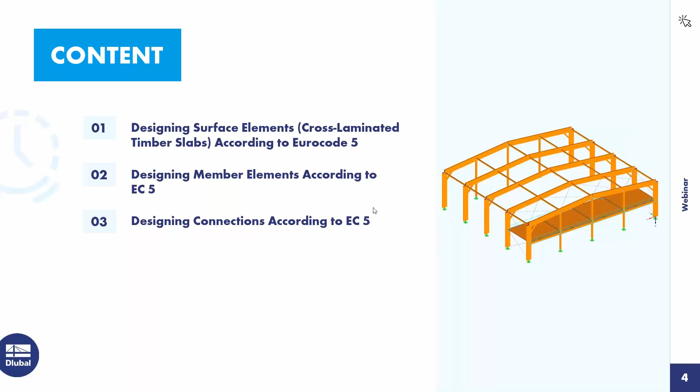All right, thank you. I hope everybody can see the screen. We had small technical issues related to the microphone in the last webinar, so whenever that's the case, just give us a sign and we will try to react to it. Also, in last week's webinar where Andreas modeled this structure that I'm going to design now, there was a question that it was sometimes too fast and attendees could not work in parallel with what Andreas modeled. To this I have to say, that's really not planned. You should focus on what I'm designing here today.

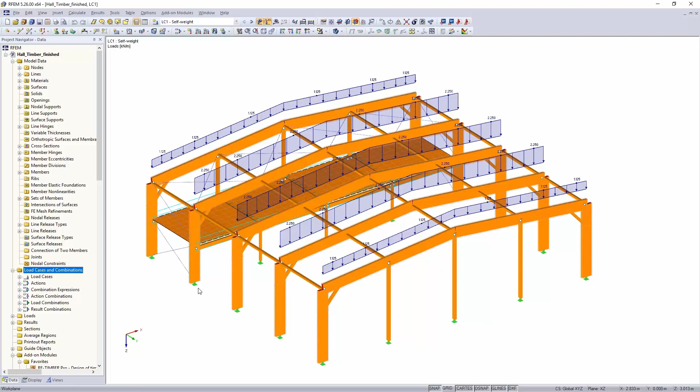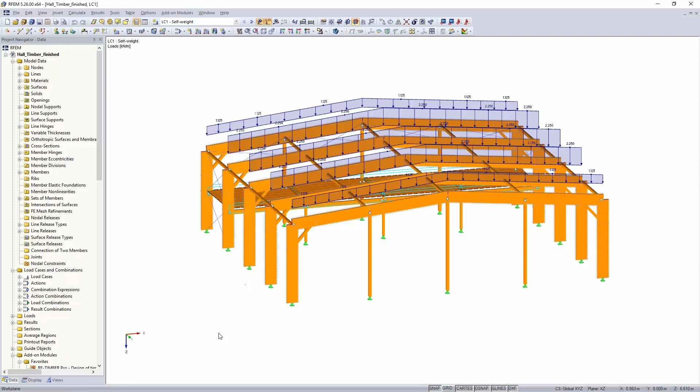The webinar is recorded and you can model it afterwards, but working in parallel is maybe not such a good idea. Another question last week was what you can do in case you have a rafter with a roof overhang, a cantilever, and how to regard that, as Andreas modeled the creeping according to serviceability limit state with a creeping factor for moisture class 1. In such a case you would have a rafter with moisture class 2 on the outside and moisture class 1 on the inside. I want to give you a short example of what you could do in such a case. On this truss, I will not add a cantilever, but I will show you what you can do in a highly nonlinear system. Therefore, I'll focus on the beam or truss in the middle.

Let's have a look at this, and I'll take a look at the serviceability limit state in combination 117. You see that in order to regard the creeping, the software increased the load by a factor of 1.6. Andreas mentioned that last week. Now, how could you do that in case this was a highly nonlinear system? Because then increasing the load will not regard creeping correctly.

That would work via copying this and reducing the stiffness. That's just one way to do it. So in general data, I will now switch off the automatic load combination and keep the current load combinations, say OK. Now I go in here and select load combination 117, copy it, and call it 'nonlinear'. Here I have this copied one. I go edit there, and first I have to reduce the increasing, so just use the characteristic level.

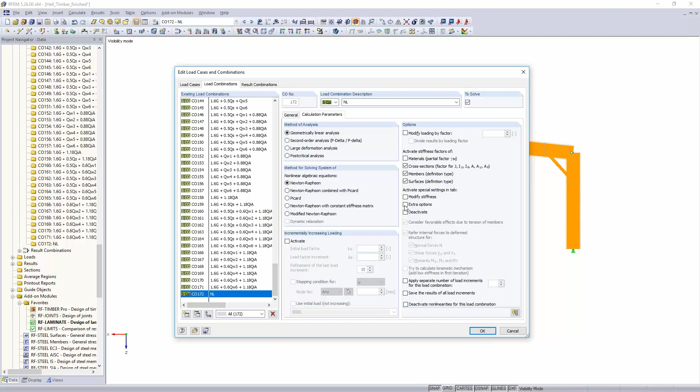Then in calculation parameters—we're going to need these options later on also for the ultimate limit state—there's a check box for modifying stiffness. If you activate that, you can reduce or increase stiffness of hinges, materials, supports, for nearly everything in the structure. For our case here, we will reduce with the vice versa value of 1.6, so that's 0.625 for every stiffness.

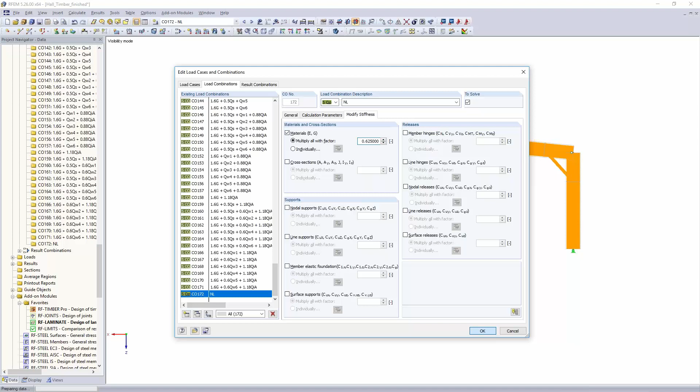Press OK, and now when we look at the load combination—we want to see both—at load combination 117 you see that you have a deformation of about 40.7 millimeters with the increased load, so with a factor of 1.6.

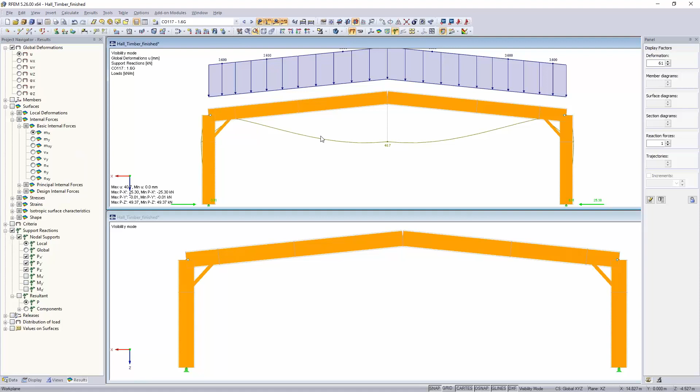So with this increased load, and here in this nonlinear combination we have the original characteristic value, and if we look for the deformation there, as this is now a linear system, you can really compare that very easily, and you see you have the same deformation just because we reduce the stiffness.

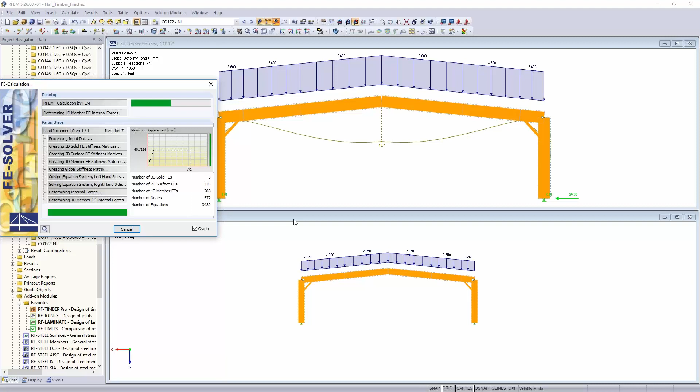So this is a way how you could do that, in my opinion pretty easy, also in case you have cantilevers outside, because then the timber material on the outside you could reduce with the factor of 1.8, which is for service class 2, and then the inside you use the 1.6. So it's just one way how you could do it. There are more options, but this is a way how I would recommend.

This was just due to the questions that we had last week, and as they were coming pretty often, I think it is worth showing that to everyone.

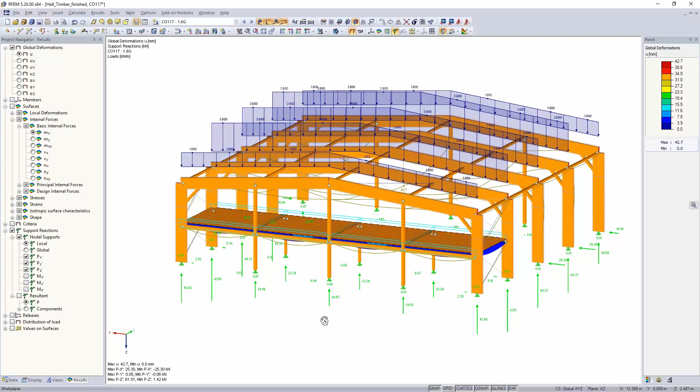Now we go into designing. Andreas already modeled here a CLT plate, just for generating the stiffness that we would need for the design later on. But what he did not do, and what makes absolutely sense when you model the structure not to do, was to also generate the stiffness for the line hinges and the releases.

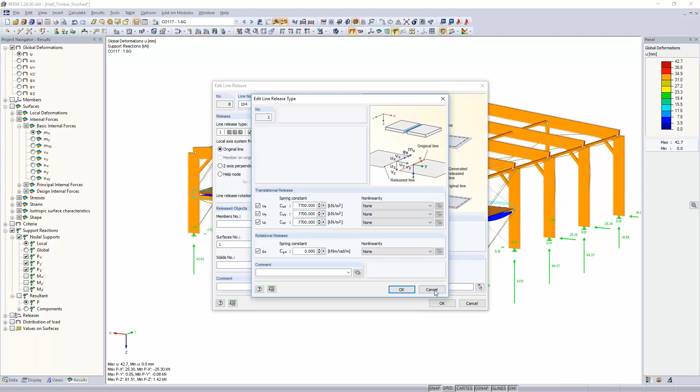So he just generally introduced this stiffness here, but for the ultimate limit state you have to reduce this by a factor of 2 divided by 3, the slip modulus. For everybody who wants to know where it is written, it's in equation 2.1 in Eurocode 5, and you can do it similar to what I did before with the serviceability limit state.

Just go into edit load combinations here, and then you check on the ultimate limit state, like every combination of the ultimate limit state, calculation parameters, and again switch on modify stiffness. In modify stiffness you say the line hinge and the line release we now also reduce by this factor according to equation 2.1 in Eurocode 5.

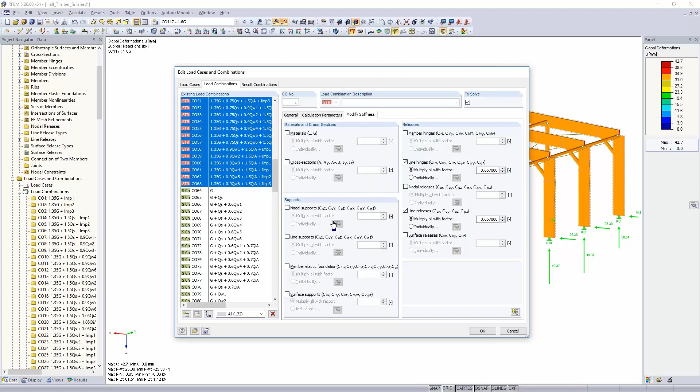Okay, so then this is done, and for SLS we are designing on characteristic level. Yes, that's what we want. So now you have also kind of generated the stiffness differently for SLS and ULS design.

Then you can now go to the add-on module Laminate, what Andreas already showed you last week. He used just the result combination here for the design. Usually you should, for the ultimate limit state in Laminate, use load combinations because it's generating stiffness and it just makes more sense.

But of course this will take now a long time, and in any design add-on that I'm presenting here today, I already calculated the design giving combination, and I will just use that in order to keep the calculation time less and not to spend hours just watching the screen calculating. I think that's not so interesting for you. You all surely know that we can generate combinations and also calculate them in not too long time, but for the webinar we want to reduce it further.

So I found out that load combination 48 will be the relevant combination for me. For serviceability limit state, I will do that similarly. For the characteristic combination, I calculated combination 104. This one I assigned with characteristic. I will get to that point directly.

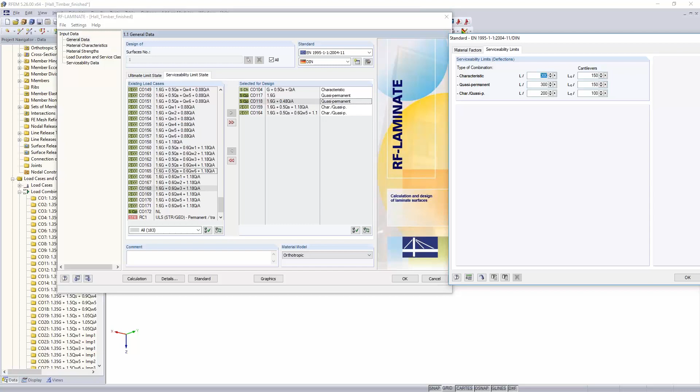Okay, I think the rest was well explained by Andreas already. Maybe we lose a small word on the detail dialog. Here the stresses that are verified in this add-on are predefined also according to the German annex of the Eurocode 5.

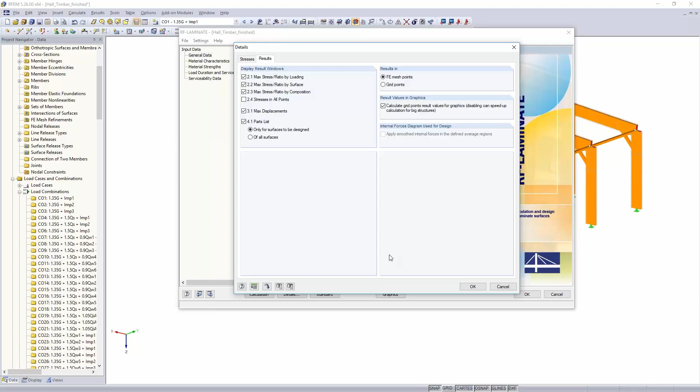In case you have a wall that you want to design, there are more checks you should activate, or a wall with wall loading behavior, then you should also activate these further checks here, but that's something more special. In the structure we are designing today, we just have a plate, or loaded plate, in this case.

Okay, material characteristics. Andreas chose a plate from the producer KLH. Just to introduce all the other producers once again, we have here also producers like Södra, Steiko, and so on.

We try to keep the producer database up to date, but it makes sense to do a double check with the producer, just in case he changed some of his setups or some of his factors. In general, we try to implement every producer according to the technical approval from the producer.

Okay, so we choose the KLH. I'm not going to change that today. Here, edit details was also shown. KLH uses timber without glue at the narrow sides, at least for the stiffness.

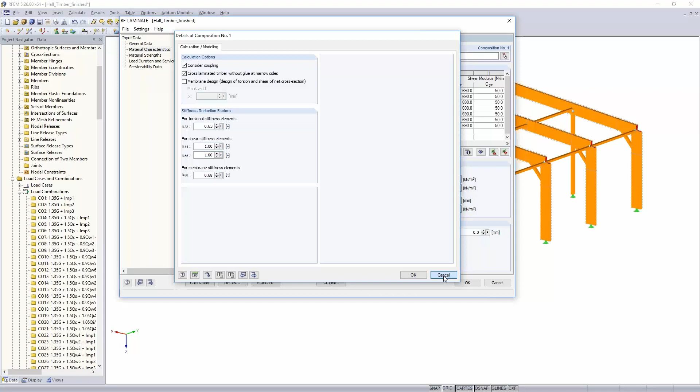That's what I said: in case you have a wall loading behavior, you should activate the membrane design here. All the factors are predefined according to the technical approval, and this generates this stiffness here. The strength counts the same way as well.

And load duration and service class is also assigned. Once again, in case you have a rafter with a cantilever, also for the strengths, you must choose a different service class. That can be done quite easily here. We are completely in service class 1, but for the strengths, you could choose different surfaces with different moisture class. That's no problem.

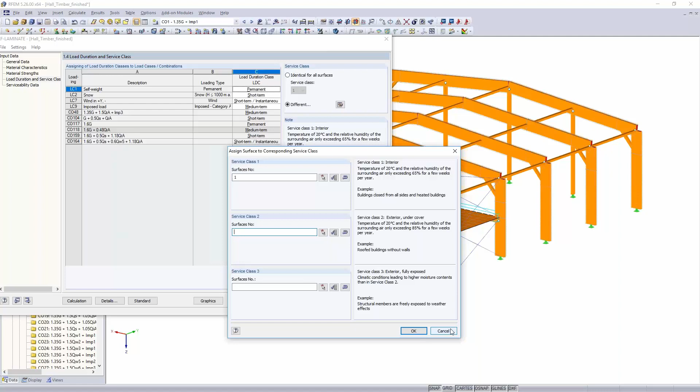All right, and then serviceability data. We just have this one surface here, and we want to verify it to the shorter length, which is from this point to this point, 4 meters and 50 centimeters, and we assign it to a displaced parallel surface.

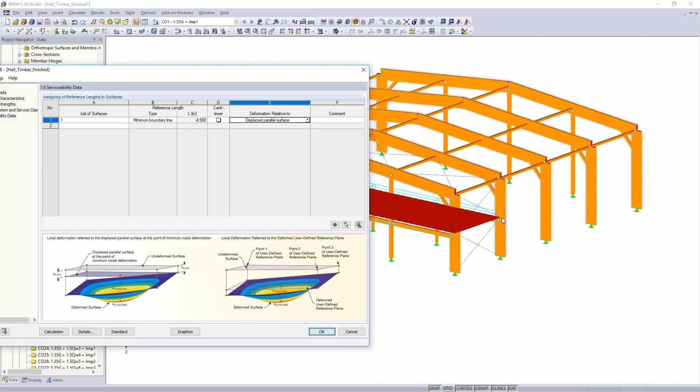I hope these pictures describe it quite well. Undeformed is just the undeformed system, and displaced parallel surface means the whole structure can deform, and we only verify the deformation from one node to the other. All right, then we calculate it.

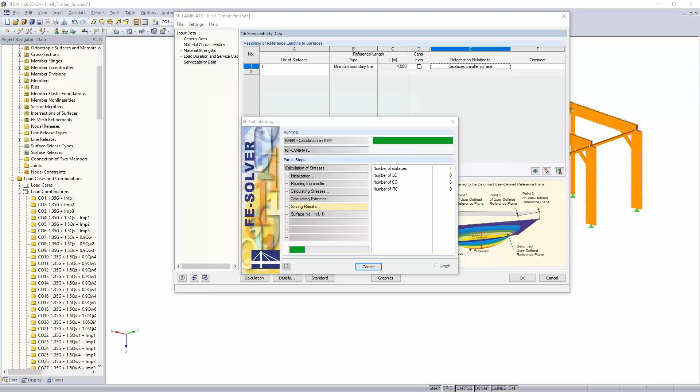Okay, so for the stress design, we have now a ratio of 42% loading, and it is tension compression, which in this case comes also from bending and tension compression on the outer sides.

If you go to the graphics, maybe we can switch off the rendering, yeah, that helps. You see that you have pretty high loading where the support in the middle is, and there are probably also shear problems on the edges of the surface, which also makes sense.

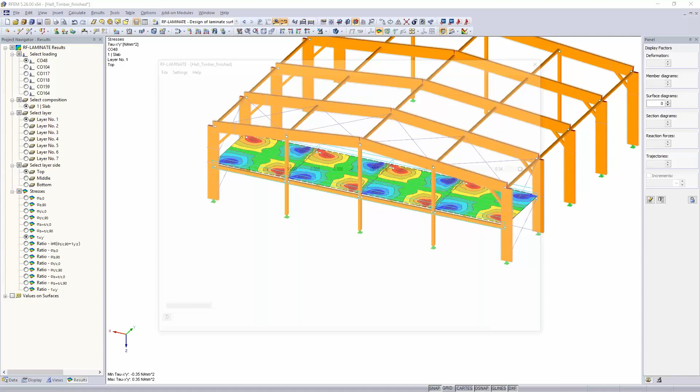So 42% is not loaded that much here in this case, but you also have to take a look at the deformation of the structure, and this is verified here.

And so if you look here, you see that for deformation, the loading is even higher, so we have a loading there of 75% in this case, in the characteristic situation.

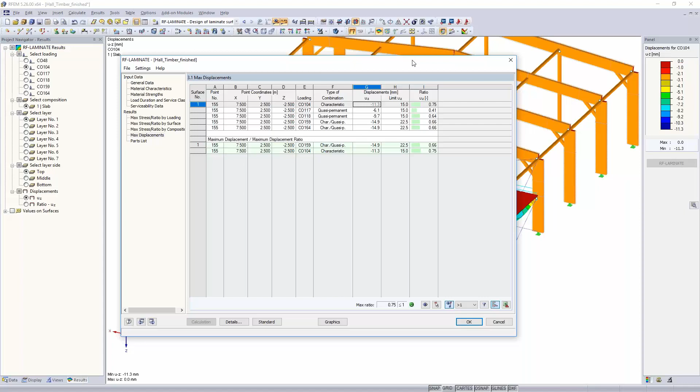And you should then also not forget, maybe you would need deflection analysis as well, just in case this is required.

Okay, so then at all, the design for the beam is done here, or for the panel is done, and we could go to the design of the members. Maybe one thing that I forgot, it makes sometimes sense to get one of these pictures, for example, into the printout report.

You can do that here directly in this column. Maybe when we get a nice shear, this one is probably something you would also want to add to the printout report as well, and maybe something outside the graphics, this one, for example.

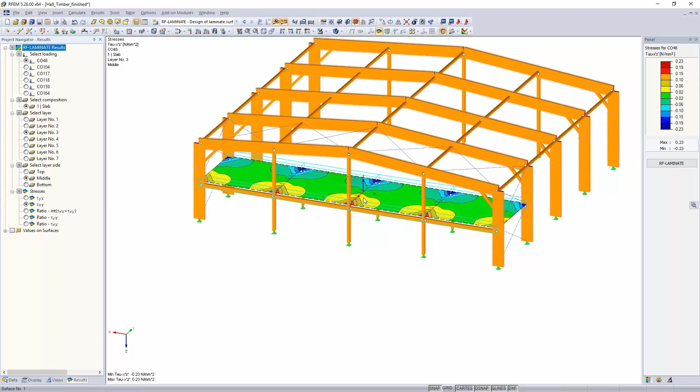So the design of the plate is done with this, but the connection on the edges of the plate and also on the outside of the plate needs to be done, and therefore we will just grab the combination 48 in ultimate limit state.

48, 48, there it is. Here in the result you have down below the option releases, and there you can see what normal force you have in the line hinge.

That's not so interesting here, I think, but for the plate lying on top of the beam, it's probably relevant, because this is the shear between the plate and the member, and that's what you really need to connect. You see that the value is not that low, and that's something you probably need to verify. So this gives you a good graphical overview.

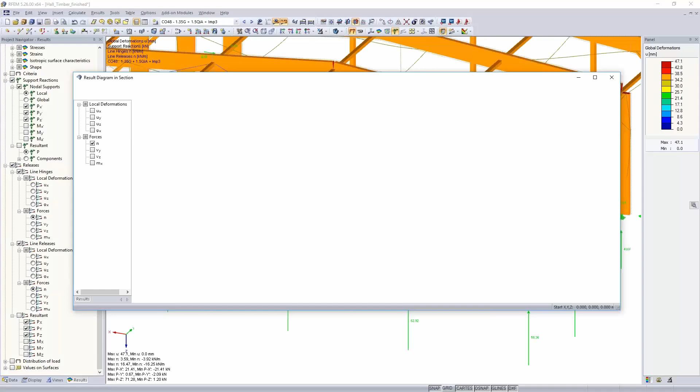Via right-click result diagram, you could also smooth around this area. You see here, it's not a really high peak, but you can say, okay, my connections go, for example, over a meter. If you say I'm starting at 1 meter and ending at 1 meter, and then I want a linear or constant value, you can also smooth it a little bit, so you have a value of 10.8 instead of 15.35 kilonewton per meter.

Okay, so once you have done this, all the design of the plate with its connections is done. So you could say check to this, and now we go to the members. Therefore we will start the add-on Timber Pro.

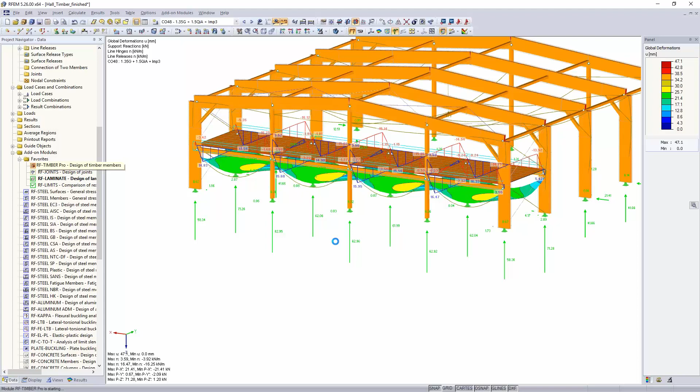In here we have members and set of members. Set of members in our constellation are important for the serviceability limit state. So for the deflection, I will only verify the set of members in the middle, so set of member 9 and set of member 6.

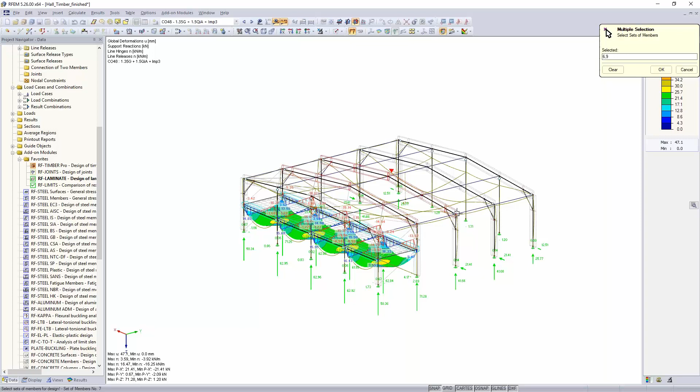The set of member is also important for stability, but in what we are doing here today, we are taking the deformation from the point where you see the mouse here and the mouse there, so we take the whole length and verify the deformation on this part. So that's what we do here.

Once again, I will not verify the complete result combination, as this would be too time consuming for the webinar, so I will use combination 38 and 44 just to have two, and I will do the same for serviceability limit state with combination 72.

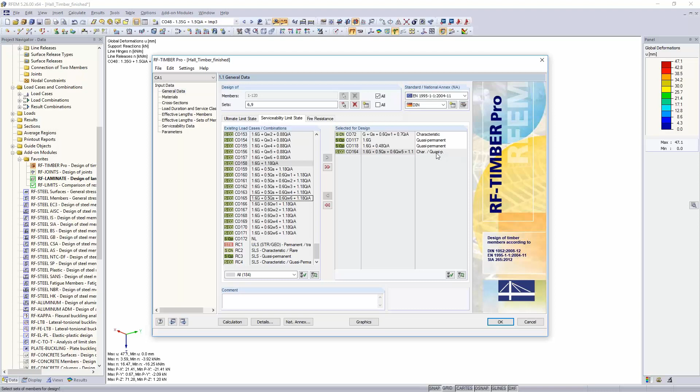For the characteristic level, for quasi-permanent and characteristic, I can choose both, as there are only two generated, and for the characteristic quasi-permanent one, I will use combination 164. Okay, once again, it's similar to what we had in the laminate add-on.

It's automatically designed. If you want to do a simplified vibration design, you could do that here as well. But for the members, I don't see that too problematic here. Maybe for the CLT, that would be something I would maybe add, but we're not going to do that today.

Fire resistance is possible with Timber Pro. It's also possible with the laminate add-on, but it requires more effort. Maybe Gerhard or I will send you an FAQ where we answer that. So it's possible, but in laminate, as laminate generates stiffness, it's just more effort to do.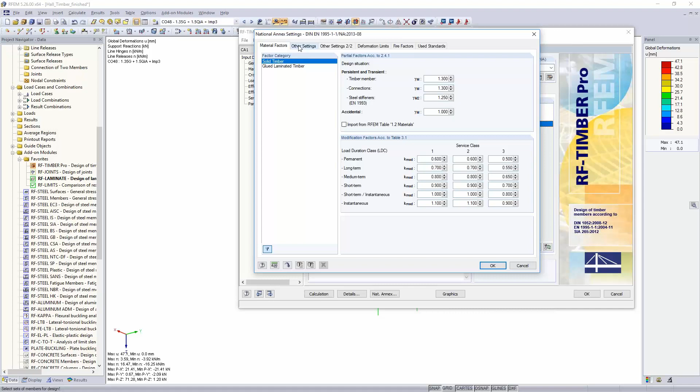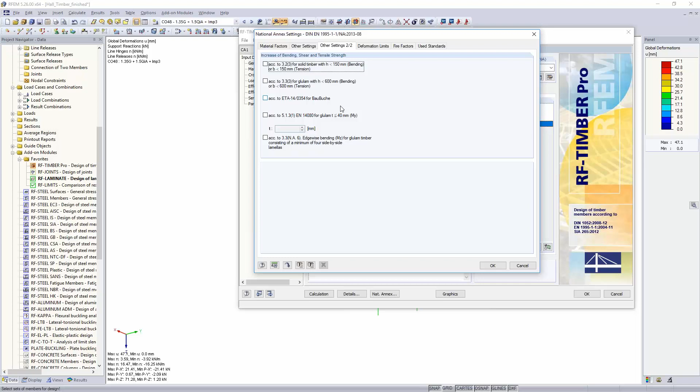Nevertheless, it makes sense to take a look at the detail dialog of the National Annex, because you not only can define deformation limits, but you can also add all the other factors, for example for K-crack, for shear verification. If you want to calculate LVL from the producer BauBuche and so on, you could also activate that here in the detail dialog.

The rest is not so important. Load duration service class, it's also the same dialog as what we had in the laminate add-on. One thing I forgot when we started, in this case we defined imperfections and calculated the ultimate limit state according to second order theory. Therefore buckling does not need to be verified, and for lateral torsional buckling, I have a pretty stiff sheeting and will verify that separately, so I can switch off the whole check for stability.

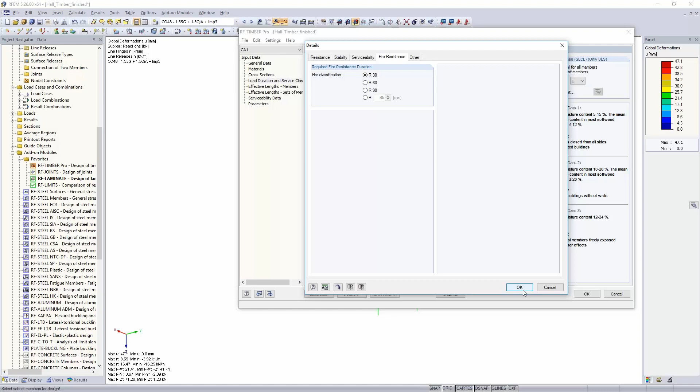Serviceability, that's the same as what we had in laminate, with deformed and undeformed system. Fire resistance we do not do here. Okay, that's this. Serviceability data, okay, we say set of members.

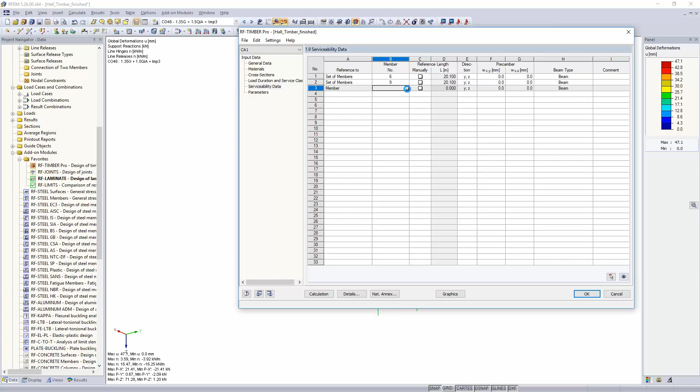I remembered what we did there: member 6 and member 9, the ones in the middle, and I'm using the full length. And maybe also the members underneath the CLT should be verified for deformations.

I will now only take the one here inside. Maybe I just don't care about the ones on the outside, and verify them. All right.

Parameters include shear force reduction and also cutouts, which we do not have in this situation. So we could start the deformation and start the calculation of all the combinations that we assigned.

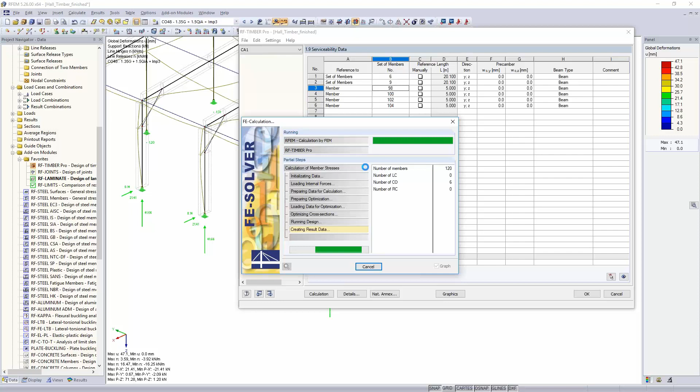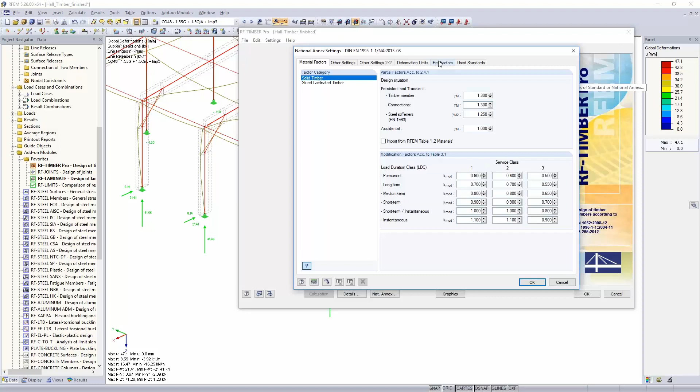Okay, there was a question about fire resistance. Let me quickly introduce that a bit more. I won't verify it today, but just to keep you informed: in order to verify fire resistance, you must create an extraordinary combination in load cases and combinations. Then we reduce the section with the so-called burning rate, and according to this rate we redo all the ultimate limit state verifications with the reduced section. It's not so different from what we already did here. Hope that explains it.

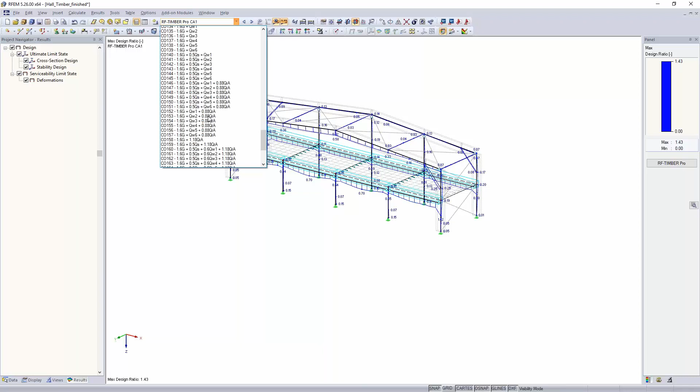Let's look at combination 38, where we calculated that, and check the inner forces, specifically the torsional moment, which is the critical point here.

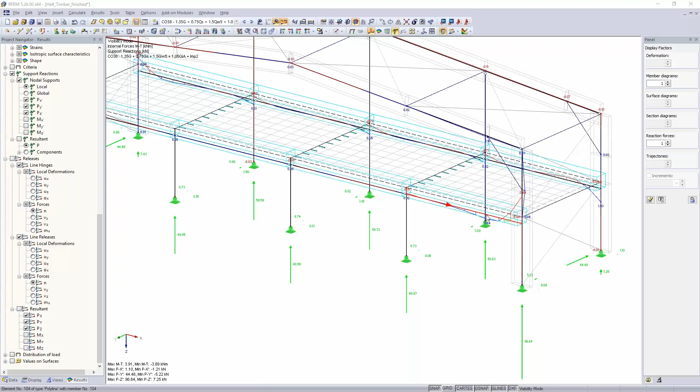In members, torsional moment, let's switch off the releases. You see we have a torsional moment of nearly 4 kilonewton meters on the edges. It's clear we forgot to set the degree of freedom here. It's only set for the moments in Y and Z direction, but not for torsion. So phi x on these edges also needs the degree of freedom set to zero, which is always the case in timber design.

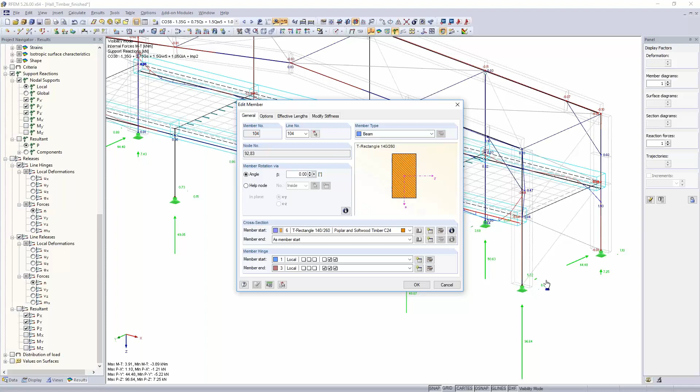That requires that I delete the results, because a moment of 4 kilonewton meters could hardly ever be transferred with any kind of connection type that we have. We'll do the same here on the start of the member, applying the same hinge there.

Now when we calculate combination 38 again and look at the torsional moments, you see that we've really decreased the torsional moment by a large amount.

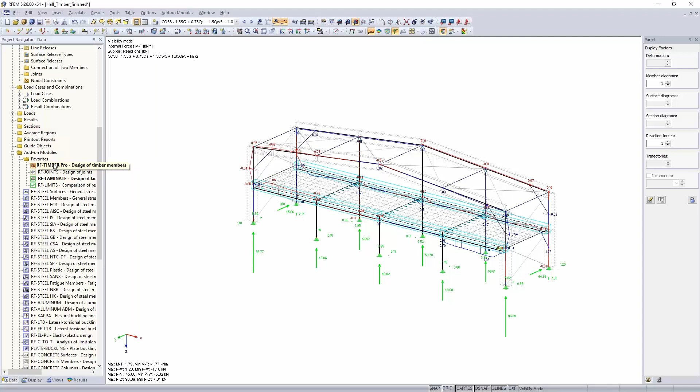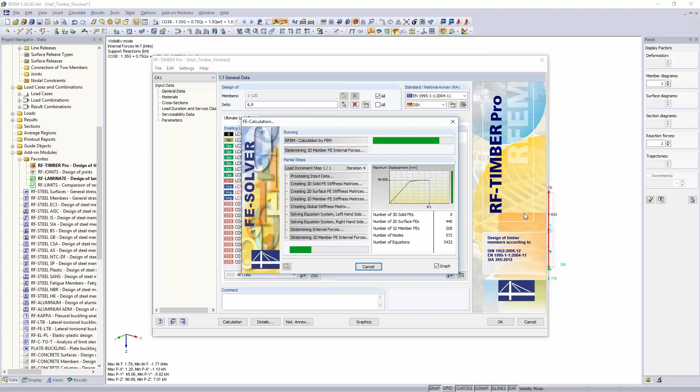Now when we go back to the design in the add-on, we keep the serviceability limit state. It may not make much sense here since the serviceability limit state wasn't really a problem, but let's check the deformation of the longer set of members, and I want to show you the graphical presentation too. Now you see we don't have any problem from the ultimate limit state, and the design is now governed by serviceability. All verifications are listed here, and you can recalculate everything done by the add-on.

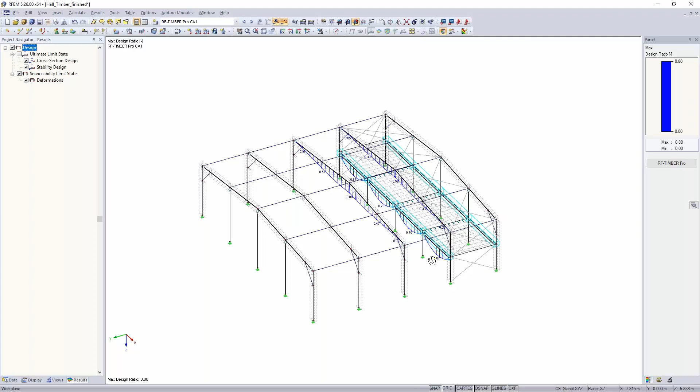If we switch to graphics and view the whole structure with ULS switched off, you see that the longer beam in the middle is actually design-governing, as I expected, with a loading of 80%. The smaller beams underneath the CLT plate are also loaded pretty high.

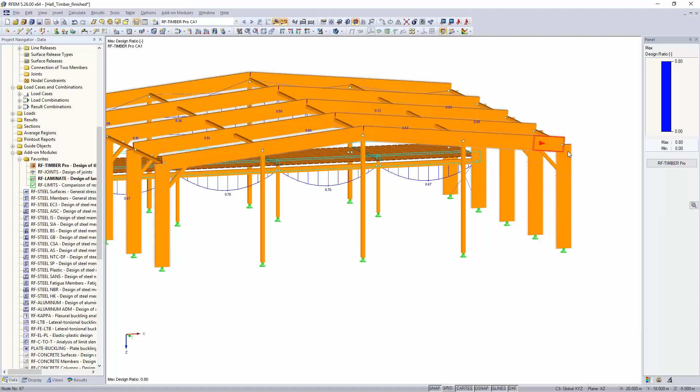That would be the design of the structure. Now we can calculate the connections. I want to concentrate on the connections at the outer edge of the hall, and if we have time, also the connections between the column and the beam spanning from this point to this point. But first I want to design the edges, so I'll start the add-on RF-Joints.

So that's a little bit different to what I showed you in the Timber Pro and Laminate add-on, because in this add-on we have the possibility to design steel and timber. These are all different add-ons. So we are concentrating today on timber, and in this add-on you can still separate between steel to timber connection and timber to timber connection.

Steel to timber connection is every indirect connection where you have a steel plate sliced into your structure, and timber connection is a connection between main and secondary truss or load bearing. So we will concentrate for this corner here on steel to timber connection.

You can calculate dowels, bolts, nails, and screws. We will design dowels. You have the option to design different joint types. Our joint type will be without continuous member, because we will just have two members that are connected in here.

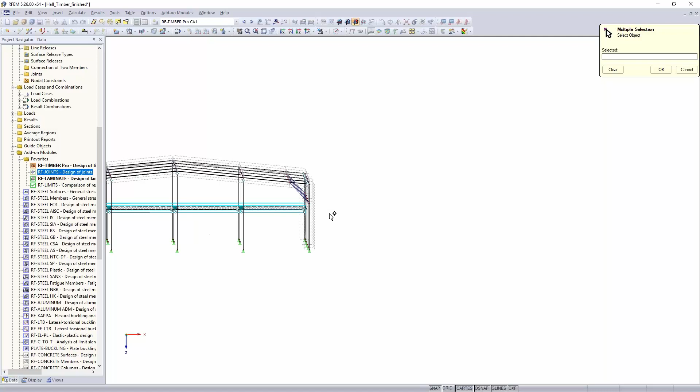All right, then we go into the structure, and therefore we will select - let me switch off the rendering again and also the results. And so we will calculate all the corners here with one check, and also the ones from the other side.

All right, so now I get a lot of alerts, which is clear because we have invalid members, because steel rods cannot be designed with a steel plate, and also the secondary beams here do not make too much sense. So we will just keep the connected member and the main member, and all the other members we will set as inactive.

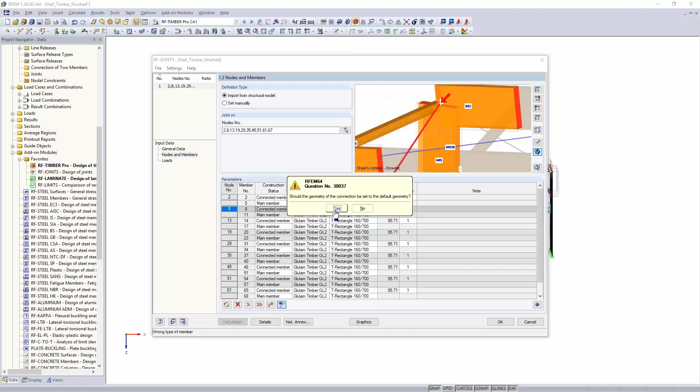So this one inactive and this one as well. And then it asked me, okay, shall all the other connections work similar to this? Yes, that's what I want. And do you want to have default geometry? No, I do not want that.

Okay, now all these nodes have the information that they should be connected in here. Once again, I will just assign one ultimate limit state combination, so let's say 2, 13 and 19.

Load duration and service class I will just skip. I don't think that's too important. And now we are in the dialog of the geometry, and that's now the important dialog.

Here you can at first define the shape of the steel plate. User means that it's just assigning the steel plate on the outside edges of your structure. You could also have it rectangle - then it will be a rectangle one, and it could also be convex. I think user for most constellations is the one that you would want to have.

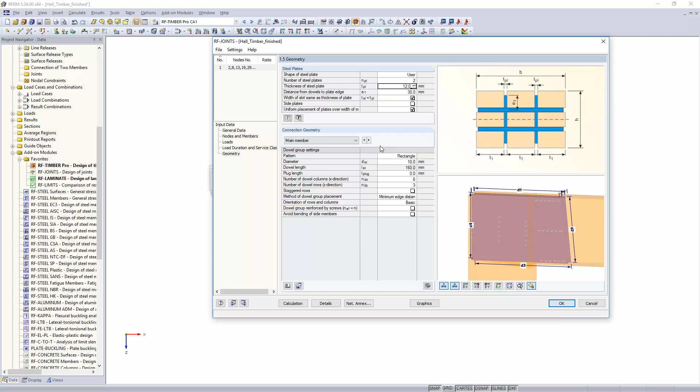You can define up to 5 sliced steel plates. For our first design approach, I will assign 2 steel plates. I will give it a thickness of 14 millimeter, and everything else I will leave as it is.

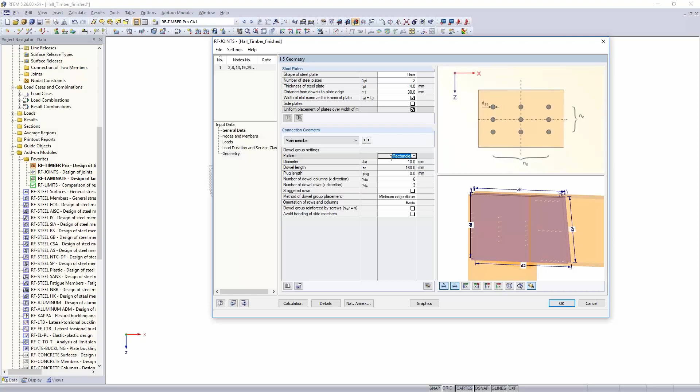We can also define side plates, but I don't want to do that for dowels. It's probably not so sensible. For nails and screws, it makes maybe more sense. We can choose a pattern, rectangle or circle.

And here we define the diameter of the dowels. I keep them similar as the plate with 14 millimeters. And I say I want in X direction 8 dowels and in Z direction 4, and maybe also want a more sensible limit distancing with user-defined limiting.

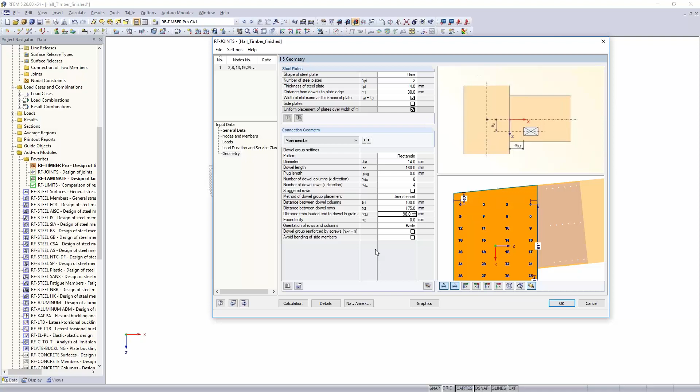So for the main member, I will choose A1 of 100 millimeter and A2 of 175, and that was too quick - A3T by 98. Okay, so that's that.

I have to do the same for the connected member. So that's 14, so 8, 4. And also here I make a user-defined distancing with 105.

I could save all this group to a library and just get it back again. So that's also possible. I do not have to define that every time again and again.

No, talking and inputting is too much. So A2, I define a distance of 160 and A3T a distance of 130.

Yeah, this is this. I could also reinforce with screws, but I want to look if this is really necessary in here. And when I have bolts outside, I can avoid bending of side members. So these are more options that I have.

And now when I calculate it - what did I choose now? 19 and 13, sorry.

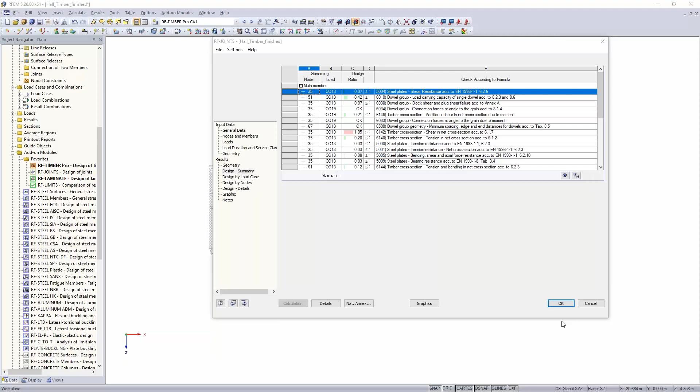So now we see that it's overloaded by 5%, but we also see that the steel plate is loaded nearly nothing, only 7%. The dowels themselves are loaded by 42%, so that's also not that much.

But in the verification of the dowels, you can see that we are verifying the force in each dowel. We really get the force and also the deformation that we have in each dowel. You see that we have an overloading by shear of the timber, so the timber is overloaded.

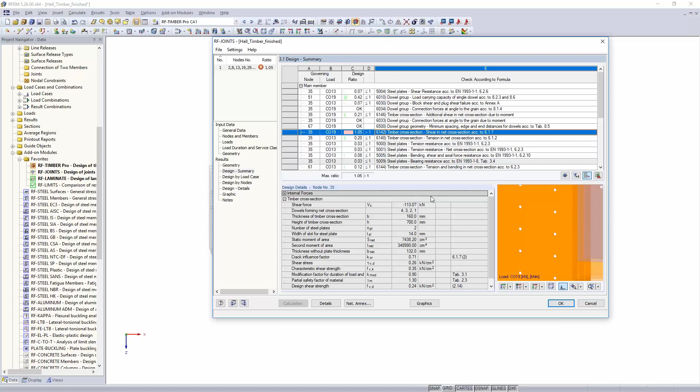And now what can you do when you have an overloading of the timber? According to Eurocode, you should calculate with regard to slip in the connection.

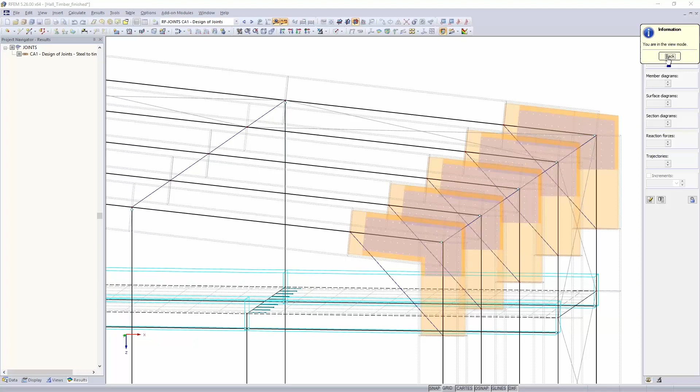Right now when you look at the structure, there is still this connection assigned, but it's still this moment hinge here with a value of 0, and this member is connected to the corner point. But if you look at it more detailed, you would say it's probably connected via all the dowels, and here is actually no connection. So the static system we are designing here is actually wrong.

And now this add-on gives you the possibility to generate the member eccentricity and also generate the connection model. If you activate that, it asks you that it will delete all the elements and create a new static system.

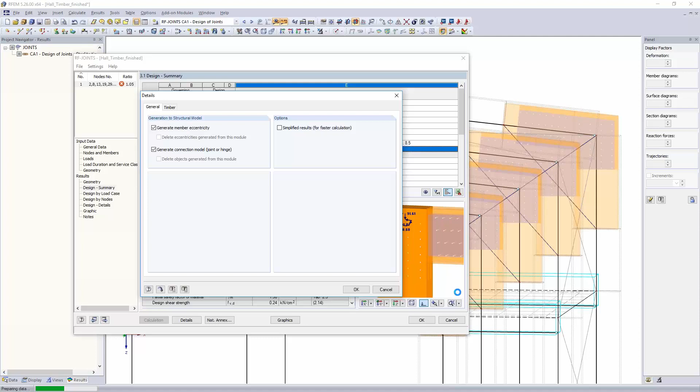So if you look at the back of the screen right now, you see that now that I pressed OK, it overrides every element that I have activated, and it kind of loosens. I have to go outside, and maybe we'll just look at the truss in the middle again, just like we did at the start.

So if you look at combination 13, I think that was the design governing. Let it calculate.

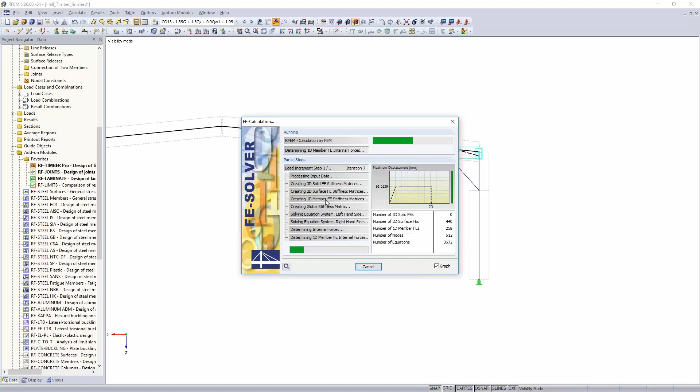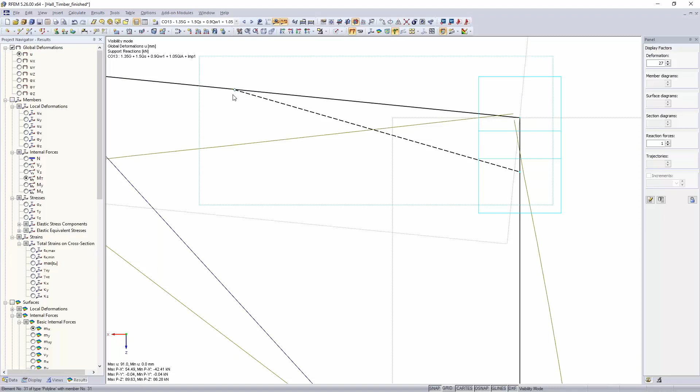The joint is not so relevant here, but when you look at the deformation, I think that's probably the most impressive thing to see. You see that there is no connection anymore, as the connection now goes from this point to this point. So that's the intelligence behind it, according to Eurocode 5.

So with this information, we go back to the design tool. We saw that we had a pretty low loading of the steel plate. So to me, even with now a higher loading of the connection, but usually when you calculate with this slip in the connection...

...you have a lower loading of the timber but a higher loading of the connections. That's what you really will find out. But the steel plate was only loaded 7%, so two plates probably make no sense here, and therefore I changed that to one plate because I think it's still enough.

But I probably have to increase the diameter of the dowels. So I keep that now at 18 millimeters, and I do the same for the main member just to have it similar. Everything else I leave as it was and calculate again.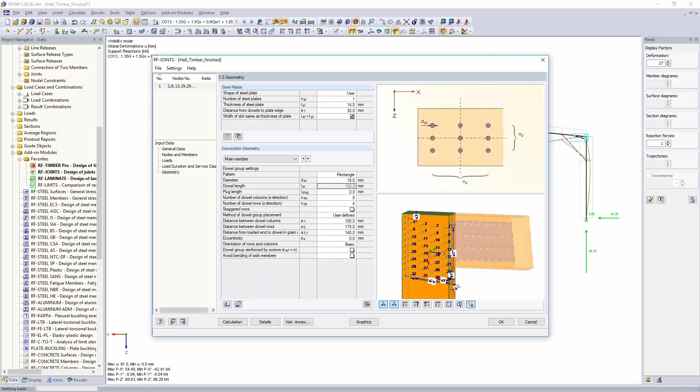Now it asks me again, okay, that means I have to change the stiffness because I changed the diameter, and the stiffness exported right now was according to a diameter of 14 millimeters. And calculate that again, and I hope, I cross my fingers, that now the overloading of the timber is not a problem anymore, hopefully.

But I expect problems in the connection design there. So you see now we have an overloading of 12%. Damn, that's actually not what I wanted, but let's have a deeper look into it.

So the dowels are now loaded nearly 50% more. Steel plates are also loaded pretty much more, but the timber is now not a problem anymore—here the connection is the problem.

Okay, what else can you do if you do not want to change the geometry? The main member was actually okay. Maybe the connected member is something you could try to improve, and that's what I said when I started the add-on: you could reinforce it by screws, for example.

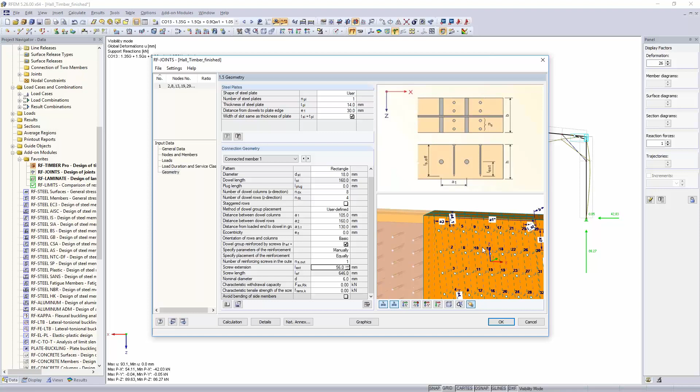So if you want to do that, maybe I define it manually. I want to increase the length of the screws to near the outside of the beam. I can just extend it by 10 millimeters, and if I'm choosing a screw according to their technical approval, I can assign a strength of 12.5 and maybe also say, okay, I avoid bending of side members.

That would actually require also some screws on the outside or a bolt, but just for giving it a try—a bolt is also possible here as well.

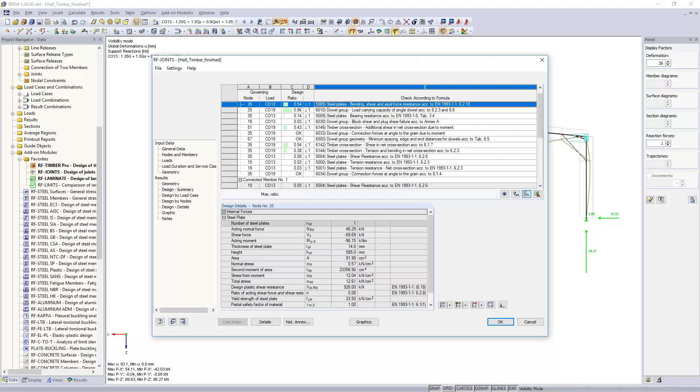So I saw there was a question about IFC and BIM, building information modeling. That's not part of the webinar today. Andreas will probably make webinars on this soon, or we already have some he can send you.

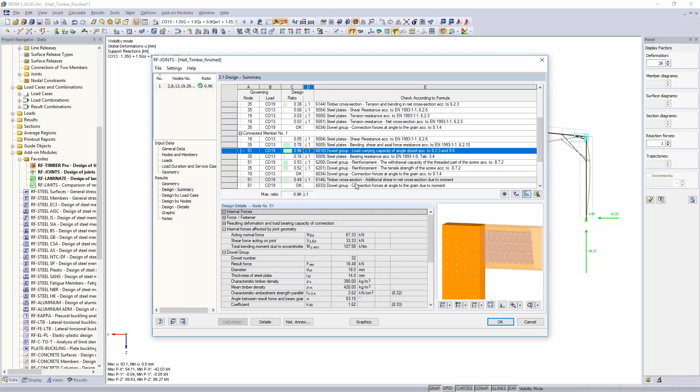Okay, got the result. We have success now. Everything's below 1, we have the green check here. We have only 96% loading of the dowel group, that's what we want. Here in geometry, you can see the stiffness, similar to what I did with the connections in the laminate in the CLT plate. It does it similarly or differently for SLS and ULS situations, using the same equation 2.1 according to Eurocode 5, and exports that for every load combination differently.

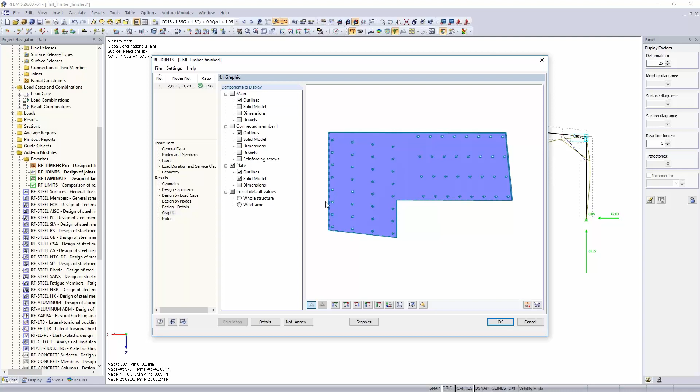You can also export a DXF or a plot, maybe when you just want to export the plate to something. You can also export to your CNC and create a shop drawing of it as well.

Yes, we can check connections also for fire. I mentioned this when I introduced it, but with a simplified approach.

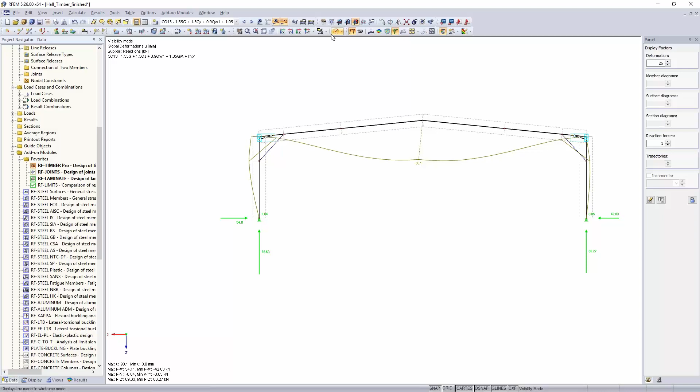We have a few minutes left, so I can take the chance to show you now, maybe not the connection or foundation design as this was a question here, but to show you where you can do it, because I wanted to connect the beams here from where the CLT panel plates are supported onto the column, and also the footings or the foundations of the columns.

Let me look at what combinations I want to verify. It's combination 48. This here is the same as what we had, so I won't get into details of that again.

Now if you go into RF-LIMITS here, you see this is actually a pretty big database where you can verify everything that has a limit strength. We have different object types here: member type, members, nodal supports.

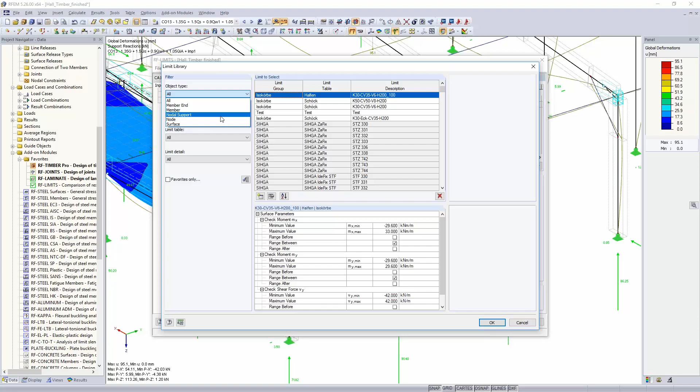That would actually be what you need for your foundation. So you could say, okay, I'm verifying this. You can already see here that combination 13 would probably not be enough for this footing right here.

We have several producers in here, from SIHGA, Sherpa, and so on. You can also create your own new limits in here, just whatever you want.

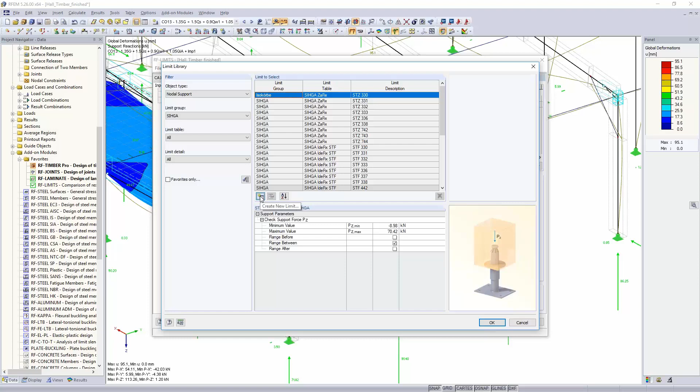And you can also verify the same point for member end with joist hangers and so on. We also have several producers implemented there: Würth, Simpson Strong-Tie, and so on.

Actually, I want to choose the SIHGA connector now today, but there are others as well. You see we can check the section dimensions and also the load.

Here we can define the list of members. I'll once again just take the inner ones, the members on the inside of the structure, start and end member, say OK, service class, and service class in this case is 1.

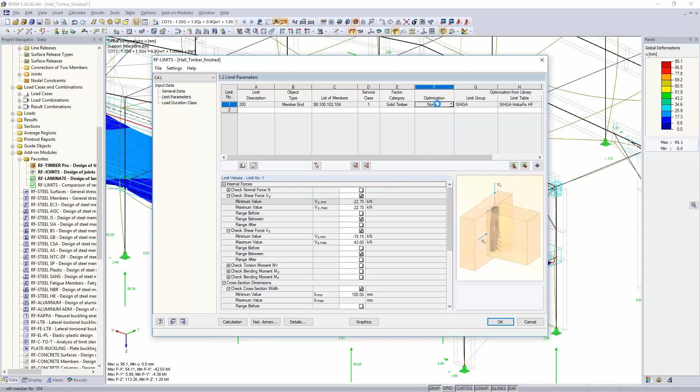Factor category, I can use solid timber. I can optimize this according to the row or the group and so on.

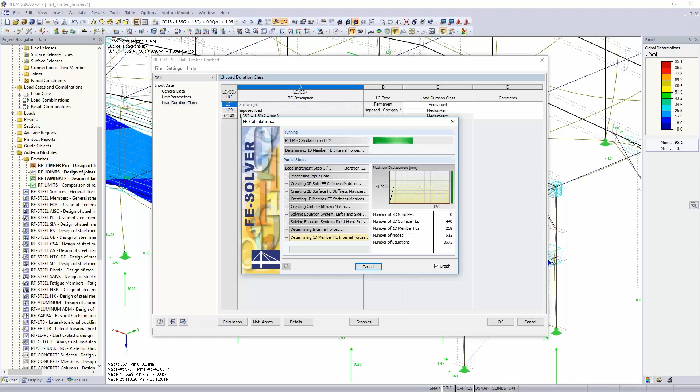Load duration class, probably there's not really much to say, we've covered that all. Medium term is the one chosen here for combination 48, and then verify this as well.

So as I said, this is the database. It will check if the section is correct, or if it's possible to put this connection that we chose on this section, and also if all the minimum and maximum values are verified. So this is it, but it's probably quite handy to check a complete structure pretty quick.

You can, as I said, do the same for the foundations, but I'm not going to do that today. All right, at this point, I would like to thank you for your attention and give the word back to Andreas.